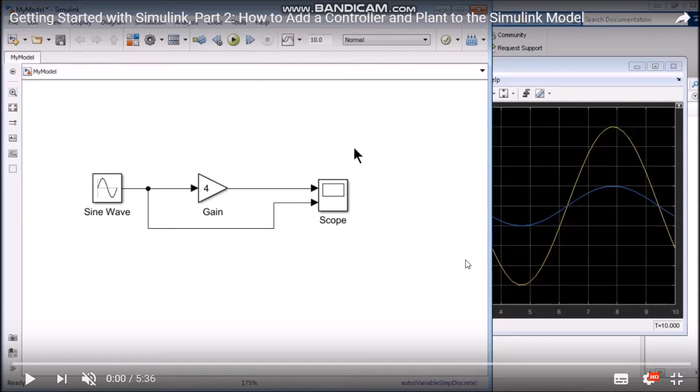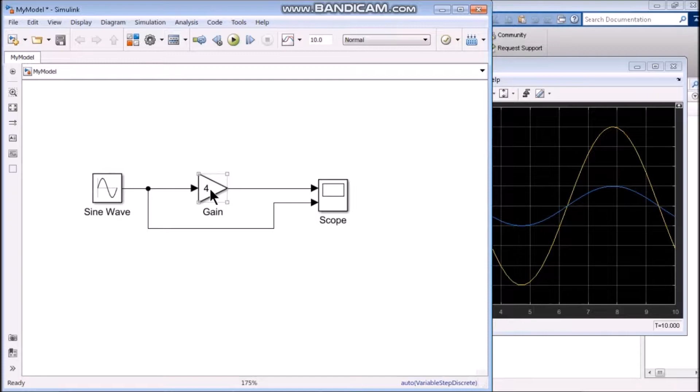This is a very simple model, but at this stage you're already all set to create your own models. But let's see how to create a somewhat complex model. Yeah. So what are you thinking? Like a plant control model? A very simple plant control model using some of the inbuilt blocks instead of building anything from scratch. So let's see how that can be done. Sounds good. Yeah, it's a pretty common application for Simulink.

Yes. So I'll just shift drag this block. Shift drag meaning holding shift on the keyboard and then dragging it with my mouse so that I can add other blocks. Now, if I don't want this block in my simulation, I can simply delete it. But if I am not sure, I can also comment it out so that I can bring it to my simulation later if I need it.

So it's like commenting out lines of code in MATLAB, right? And you can actually see it's a similar indicator there, right? Yep. The percentage sign. So it's as if it's deleted from your model. Exactly. So when I'm running my simulations or generating code later on, this block will be ignored by Simulink altogether. Right. But it's just there for my convenience. If I just want to turn it on, it's just a single click. I can uncomment it from right here.

Yeah, it's just the nature of building up models. Everything's not going to be perfect. You're going to want to try new things. Right. So, let me try something else, but I might want to go back to this. So let me drag this off to the side, comment it out, and maybe I'll refer back to it later. Yeah. So let me bring in some additional blocks here.

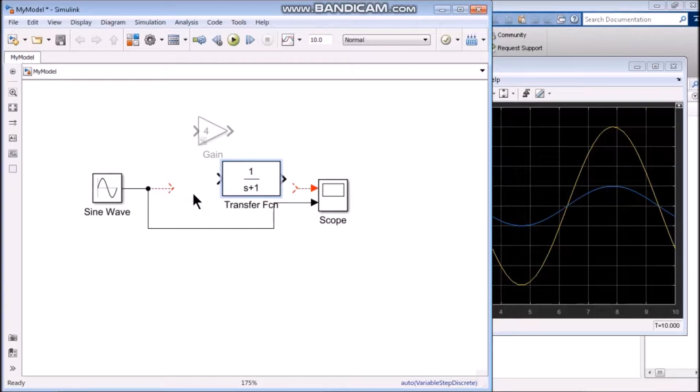I can bring in a plant model, which is essentially a transfer function. As I search for it, I find it in the continuous library. I click it, and it will bring a very basic transfer function for me. I have a first order transfer function with denominator coefficients just 1 and 1. Just to make it slightly interesting, let me change it to something like 1 5 6. And that makes this a second order transfer function.

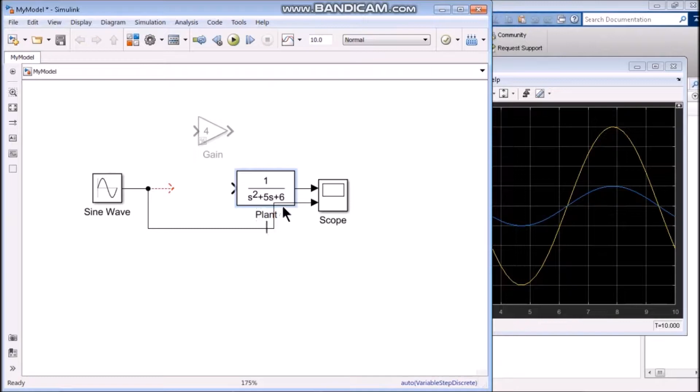Slightly interesting. I can simply bring it and join it to the scope block if I'm still interested to monitor this signal, which I am, and change this to plant. And you see this line is intersecting with the plant I just created, so I can simply click that signal and auto route it. So that will take care of not intersecting with the blocks.

Okay, so now for the plant model, let's bring a PID controller. Again, search for it. It's available with the continuous library. Just bring it in and plug it in between the source and the plant. You can see how the signal connections are pretty straightforward. Simulink is smart enough to understand that if it is aligned with the right ports, you might want a connection, and it would just create a connection for you.

Now, one thing I would do with that signal that goes from the sine wave to the scope, I would actually drag it below, right? Just a little bit cleaner. Yeah, you are free to move the signals around, but you can also let Simulink auto route it according to the algorithm for best optimization. Yeah, so you can adjust it however you want.

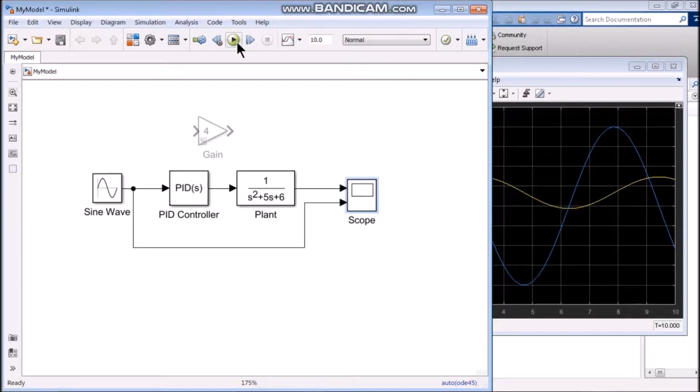Exactly. So once we are done with that, this is still an open loop control. You can run the simulation at this point and just see how it looks. And also the other thing is we are using a sine wave, and that's probably not the right one. Oh, yeah, a sine wave's not a very good input because it's tough to really track what's going on. You can't say, is that a good controller? I don't know. Right. So probably a step input.

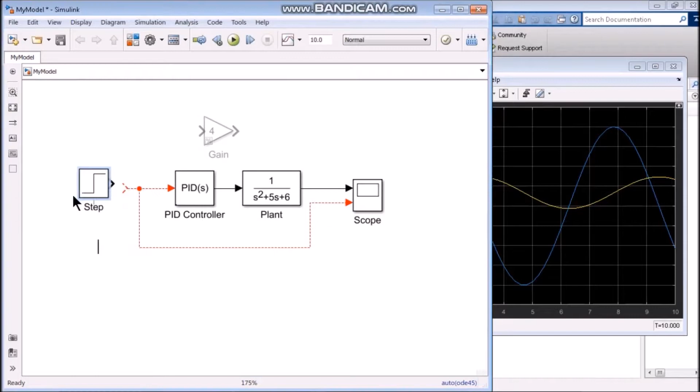Yeah, is better. So let me delete the sine wave and bring in a step block from the sources library. The default value is 1, so I'll leave the step time as 1 and just join it back to my model. Okay. And let's run the simulation now. It's still open loop control, so not very good, because blue is the reference, and that's not the best response. Right? So we want to have a closed loop system instead.

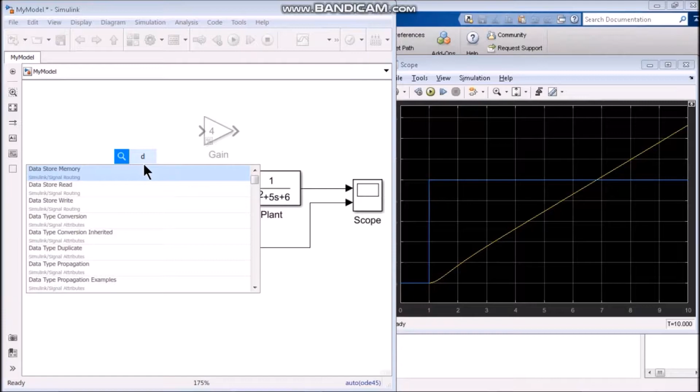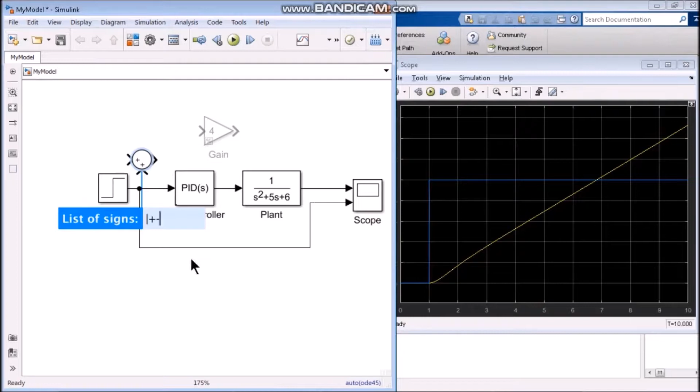I would imagine. Yeah. So I'll bring a sum block here, with the intention that you're going to take the error here. So I just look at the difference between the input and the output, so that the control signal is appropriately sent from the controller to the plant. Okay. So once I hit that, it changed the sign to minus.

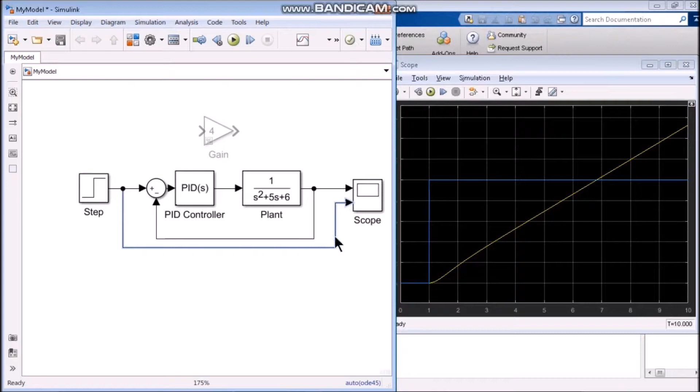I would like to just drag it here, but since there are multiple ports, it would not join it because it doesn't know which port to join it to. So in this case, you actually have to sever the connection there. But it's not that difficult. Just add it, move the blocks out a little bit if you'd like, and then take the signal back and connect it to the plant. Okay. Can bring that signal down here as well. Now this looks pretty neat.

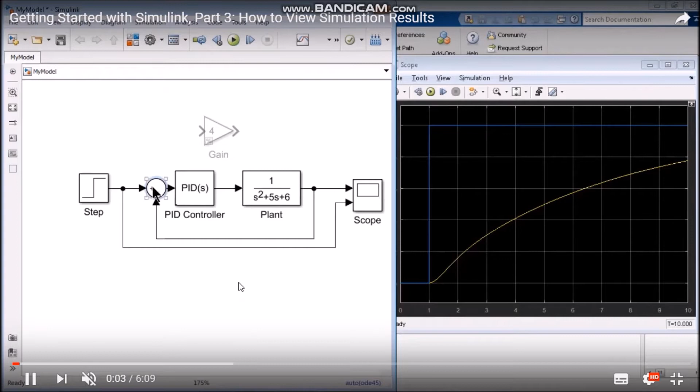Yeah, now it's closed loop. Let's see how the controller behaves now. Well, that's better. I still wouldn't say that's perfect or ideal. Right, we could do better than that. Yes, for sure. Before getting into making the controller better, I would like to focus on some of the other signal visualization features, so that we can have a better view of signals when we are tuning the controller.

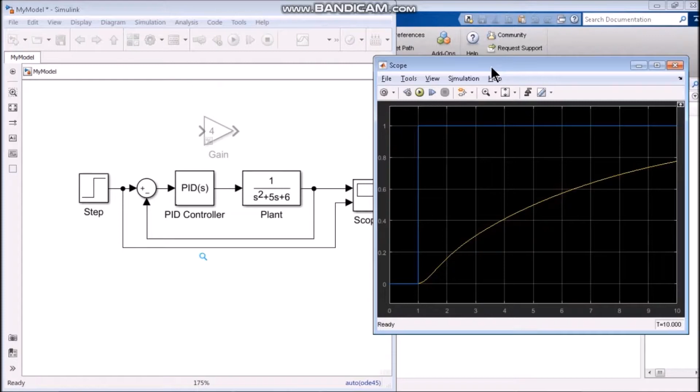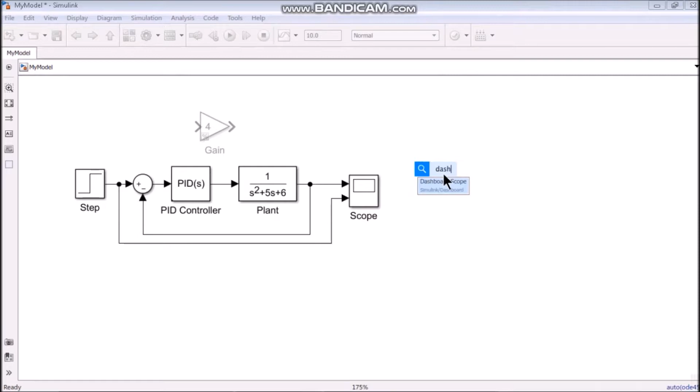So one thing I want to show is, instead of having a separate block in the Simulink model like the scope block for visualizing signals, this other block that we have, which is called dashboard scope. It's similar to the scope block, but by bringing that block in within Simulink, the scope just becomes a part of this canvas, and I can double click that block and connect the signals that I want to monitor, the output signal and the input signal.

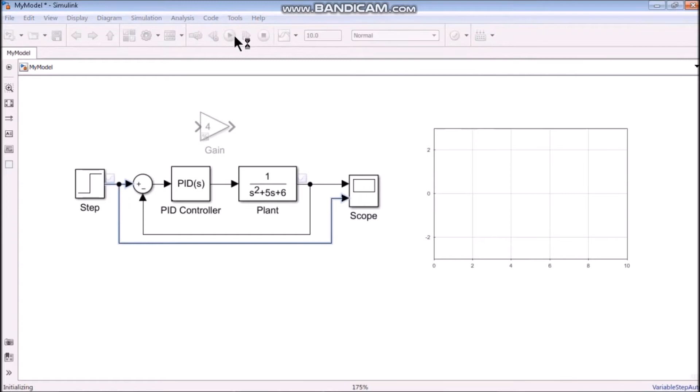Okay, let's see. You press OK, run the simulation. Right. So this way, you don't have to open up the scope block in order to see the results. You can see the results directly in the canvas itself. So I guess what I'd say about this is you have the option of what you want to do, because some people might look at this and say, well, this is great, I always want to see the results directly on the model itself.

But you've got to realize that's taking up some real estate on your model. And yes, for our simple model here, that's fine. But your models are eventually going to get larger. So having the scope block as kind of a small way to get into it is another way to go. So it really depends on your preference and the type of model you're working with. Yeah. And definitely the scope block does have some other benefits.

Like if I click the stepping options, enable stepping back, and choose the number of steps, I'm just choosing 50. And I can actually ask Simulink to pause my simulation when the time reaches 5. First of all, I can run my simulation directly from the scope block. So if I'm done with my modeling and I'm in analysis mode, I can just use my scope block, which is something you cannot do with the dashboard block, and simply run. And you see that the signal gets paused.

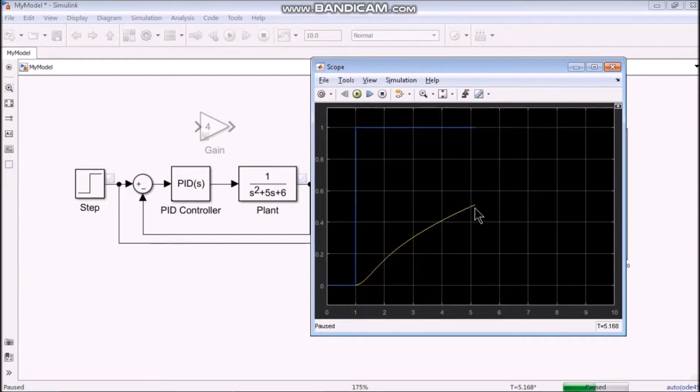Oh, yeah. And in this case, you can use other things like cursor measurements, and that will bring in the cursor measurements that you want to analyze that signal and so on. It's useful when you are just doing signal analysis and there is an interesting data point that you want to analyze. But if you are not into analysis, still in the design or exploratory mode, you can still use the canvas, use the dashboard block.

It also pauses. What if you have a signal, like, you hover on a signal that's not currently being scoped. If you click on it, you could actually see the current value of the signal when you run the simulation. So like step forward or advance. Yeah, I just paused my simulation. So I can actually use a step forward, like you said, and step forward each time step or go back in time. That way, you can look at how this value is changing at every event. So that's great. So that's used as a debugging tool.

Right. Now our simulation is only going for 10 seconds. If it were longer, maybe that would have a few more steps. Actually, we could change that, right? So if we change that to like 30 seconds. Yes, we can do that. There. And play. Right now we are in the previous simulation, so this value might not affect. Yeah, that's true. So if you press play now, it will again pause at 5 seconds. And if I do a step forward.

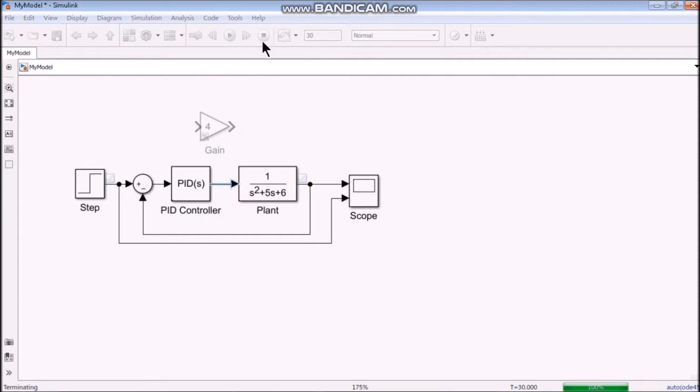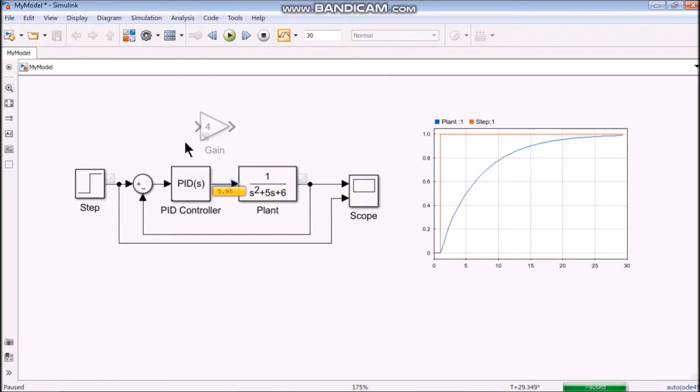Okay, so maybe if you stop it, and go back into the stepping parameters here. Change the move back and forward to say 10. Bigger steps. All right, now if I run and pause it and do a step forward. Okay. So it just goes by 10 steps. And can you re-highlight the signal, because then people can see. So the signal is changing each time you go through. So nice little debugging. You can basically visually see and monitor what's going on here. It's like adding a watch to a variable. Familiar with that? Yeah.

Okay, great. So let me disable that, stop the simulation, maybe move this back to 10 seconds, and run my simulation one last time. Let me disable the pause as well. The reason I want to do that is I want to get all the data, and then once I tune my controller, I want to be able to compare between these two. And the way to do that is actually using this badge. This badge automatically got added to the signal when you added that dashboard scope. Exactly. So when I double click it, it will open the simulation data inspector. But it would have several runs already showing here, because after I added the dashboard scope block, I have run my model several times. So each time you run a simulation, it's storing that data within this simulation data inspector.

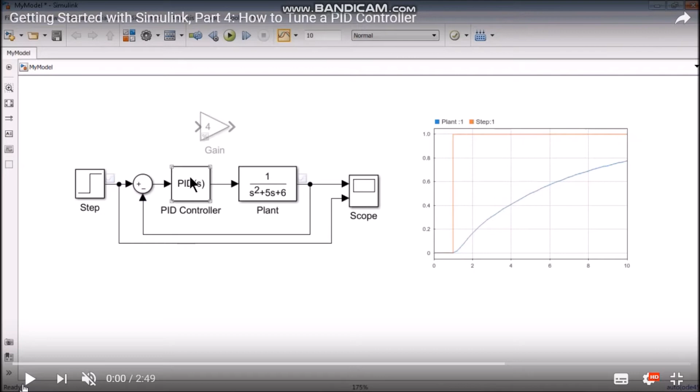Let's start tuning the PID controller, for example, so that we get better steady state early enough. So we can change the PID gain values here, which default are 1, 1, and 0. So I don't know. What do you think? We can manually try doing it, but like Michael suggested, I just inserted 5, 5, 5 for each of the gains. And if I ran my simulation, it's better than the previous. But I bet we could do better. Yes, it's not the best. And we want the best. Yes, and you might spend some time to find the best possible combination.

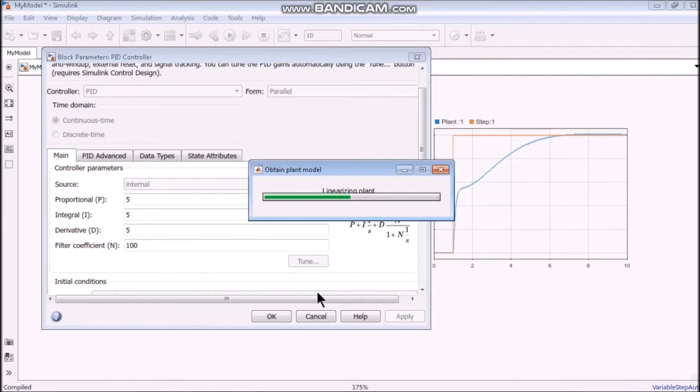But I like to use this tune button, which invokes a PID tuning tool. It's a part of Simulink Control Design product. And when I click that, it opens up a nice UI where it visually shows me how the response should look like. So just to be clear, this PID controller block is included in Simulink, but if you want to open up this automated tuning tool, that's available if you have Simulink Control Design. Exactly. And as you can see here, the dotted line is what our block is currently doing, and the solid line is how we want our block to perform.

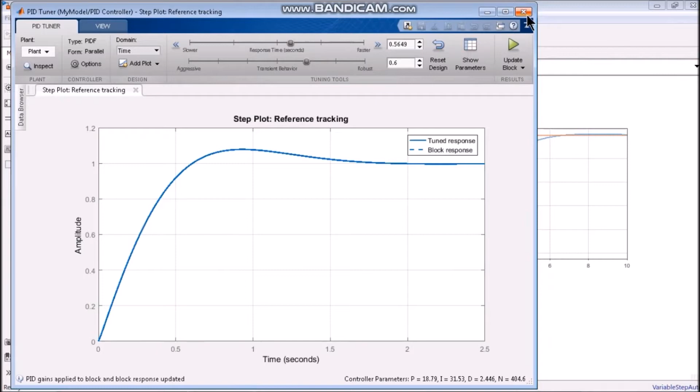And we can adjust the way that we want the block to perform by moving these slider values up here. Let's make it a little faster, so that it reaches steady state faster. And once we are happy with this response, we can simply click on Update Block. And I think that's the best part of this tuner. That changes the parameters in the block itself, right? Yes. We had 5, 5, 5. Now it's these values. I guess we weren't that close, huh? Yes, which would have been extremely difficult to guess for a specific response that we want.

Without that tuning button, I would most likely have just kept changing values, pressing OK, pressing play, and just keep iterating back and forth. So this just makes it easier than doing that. So once we have that, we can verify in simulation whether that response is nice, showing in simulation as well for that plant we chose.

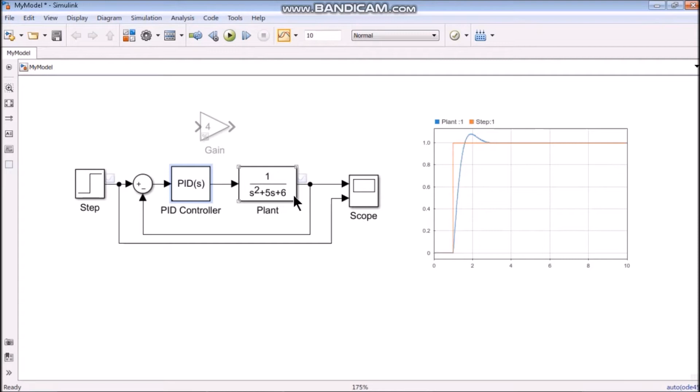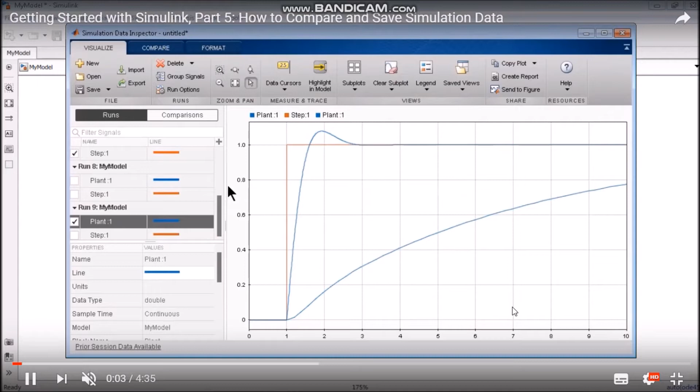So that's basically how you would tune your controller and look at the results. Now let's go back to Simulation Data Inspector, right? Yeah. So we ran the simulation a couple times already. One time we used manual, but this time we used automatic PID. So I'll rename the automatic PID tuning as just a reference for my sake.

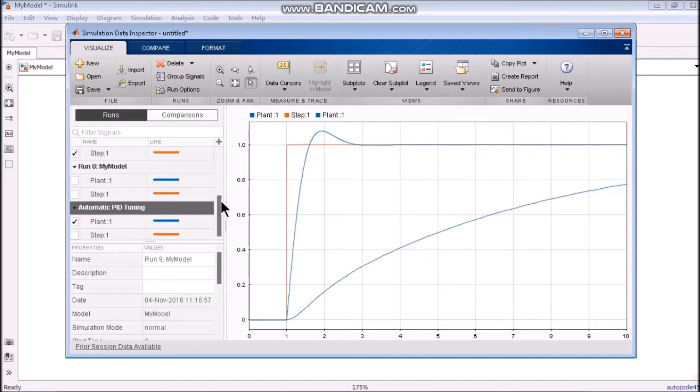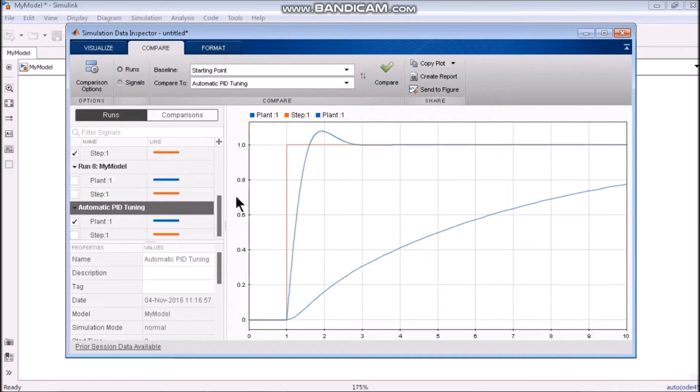Yep. And I've compared my baseline using this compare tab, my baseline as the starting point, and I'm going to compare it with the automatic PID tuning that I have done. Okay. I can compare these two simulation runs, and it would visually show me how the signals are different and the difference between the values of the signal on the bottom half.

But I think one of the reasons why people use this comparison tool is, let's say you have a model, you want to look at changing some parameters to maybe optimize the performance, but you don't want the actual results to change. Right. And you just want to make sure that the changes that you make don't significantly change the desired response. Yeah. You can do this comparison in here and make sure that everything is staying within tolerance. Right? Yeah, exactly.

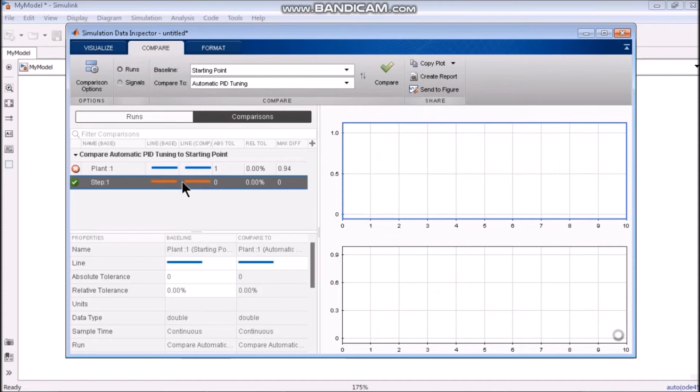And these fields are editable. So if you want a stricter tolerance, say 1. If I change it to 1 and run compare again, they should turn green because our difference is only 0.94. Right. So sometimes you just want the output to be the same, like Michael just mentioned, and in those cases you could set a tolerance and check the results. Yeah, you can imagine your model, and this is only 2 signals, right? Yes. Most likely you're going to be interested in more than 2 signals in your own models, and it'll track all of those comparisons here in one spot.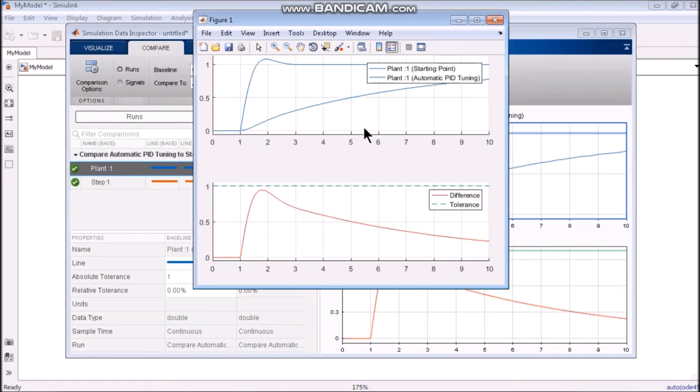In one spot, yeah. And in addition, you can also send these results to MATLAB figures. Oh, so if you click on that, it'll just open up a MATLAB figure? Yeah. And that would be a MATLAB figure. Here you can add additional information like titles and so on, and do additional data manipulations right here. It's nice being able to go from this tool to a MATLAB figure because a lot of people are used to working with MATLAB figures. Exactly. So whatever you're comfortable with. Instead of pulling the simulation data and plotting it by yourself, you can create figures from here.

So what if you do want to store all this data, though? It's pretty easy to do that, I think. Yeah. So you can save this data right from the menu items here, and oops, it's just creating multiple windows because it's loading, I guess. And so I can create a comparison data MAT file. It's stored as a MAT file. And as you can see, this now becomes a MAT file represented within Simulation Data Inspector. So when I close MATLAB, come back tomorrow and want to continue my analysis, I can simply load that MAT file using the Simulation Data Inspector, and then I'll be able to compare those.

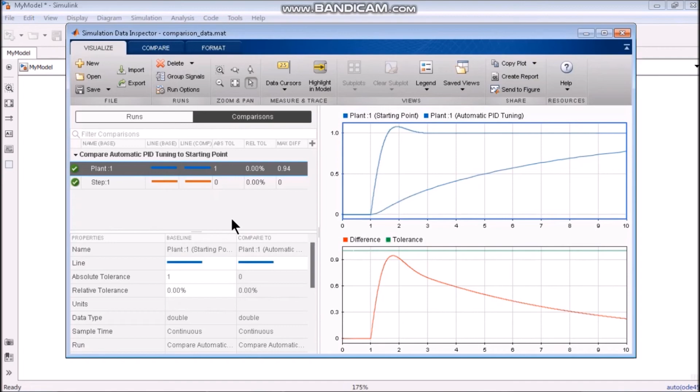Yeah. And what's nice, it also showed the same views that you were looking at before. So it'll open it up in the exact spot you were in last time, and you can literally continue from where you left off. Exactly. So that's the benefit of Simulation Data Inspector. It goes one step beyond visualizing. It helps you compare and do additional analysis right from the UI itself.